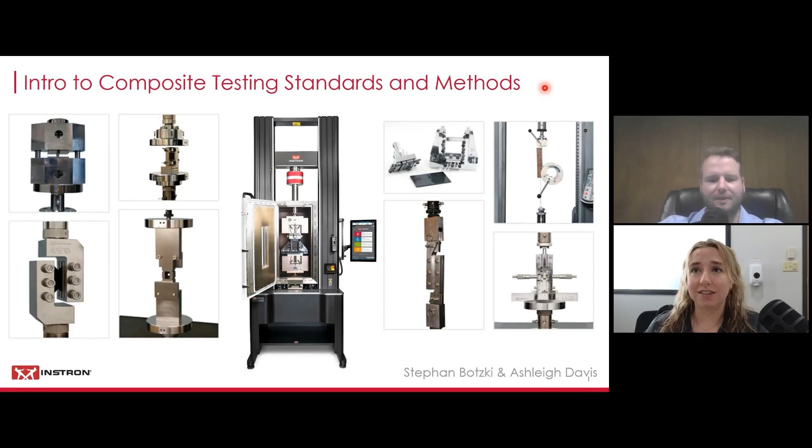So for how many different test types, it looks like 56% are 1 to 5 different test types, 24% 6 to 10, and then 19% of people are running 11 plus different types of tests.

Thank you, very interesting. This is our agenda for today. We're going to start out by looking at composite material properties. Then we're going to move into an overview of composite testing, the part where we talk about the different types of tests and testing standards that you most likely need to follow. Then we're going to look at most of the challenges associated with that kind of testing, and then some future trends, before we move into the Q&A section, where we try to answer as many of your submitted questions as possible.

I wanted to start out with ASTM D3878, the standard terminology for composite materials. This is a standard that the ASTM D30 committee works with, and it's full of definitions related to composites and composites testing. I want to start by looking at what the ASTM D30 committee actually says a composite is. A composite material is a substance consisting of two or more different materials, insoluble in one another, which are combined to form a useful engineering material possessing certain properties not possessed by its constituents.

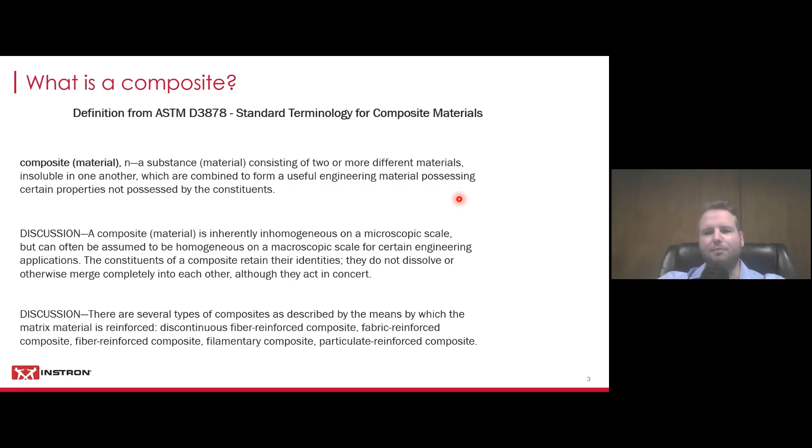A good analogy for this is concrete and rebar. You put the rebar in and pour the concrete, and they're insoluble to one another. The materials get combined, but they're not like a metal alloy where you mix in other metals and they become a new kind of metal that's soluble in one another. In composites, you keep the different materials apart, they're combined but not soluble, and they usually give you properties not possessed by the individual materials. So we're dealing with multiple materials that we try to combine.

We're going to run another poll on this slide asking about the matrix materials that you're using. So we'll move into this now. We established there are two different materials, or you could also say two distinct phases, and we break that up into the matrix and then the reinforcement within there.

The end applications for the materials we're talking about today are mostly aerospace, but there's also some adoption in the automotive industry and in renewable energy like wind energy. Wind blades are typically made from composites, and there are a couple other industries with some adoption as well.

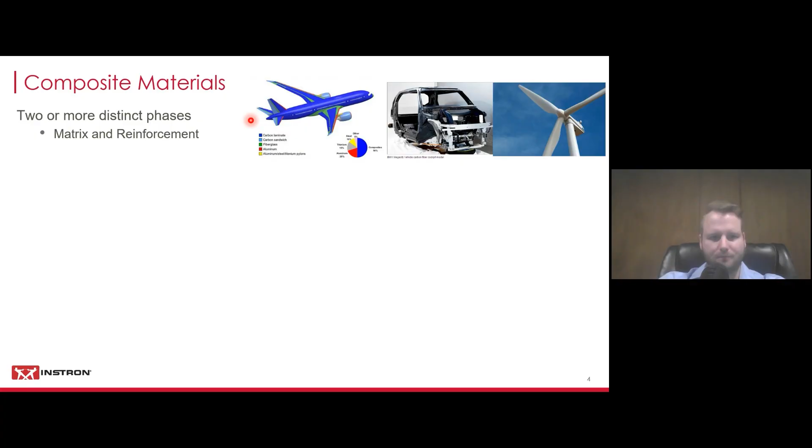The most common matrix materials we deal with are polymer matrix composites, by far the most common ones that we see at Instron that our customers need to test. But there's also ceramic matrix composites for ultra high temperature applications, which are growing quite a bit right now, and there are also metal matrix composites, plus many natural examples like wood.

So did we get any results on the poll yet? Yeah, we're looking at about 58% using thermoset, 31% using thermoplastic, and then 12%, so pretty small, using other materials—but it's definitely dominantly thermoset.

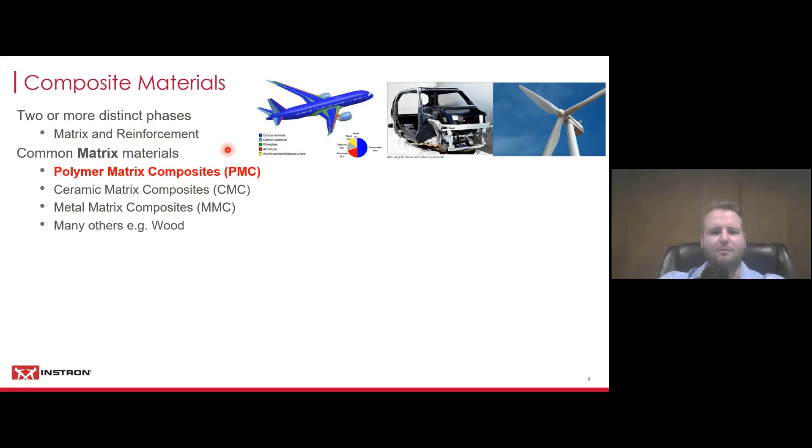That's still kind of expected, but we definitely see a trend towards more and more adoption of thermoplastic composites, so very interesting. Thanks for entering our poll there, giving us some insight into what you're actually using.

The other component we need to talk about is reinforcements, and you can break these down by their shape and form. You could have little particles mixed into your plastics or other matrix materials, short chopped fibers like in this example, or continuous fibers that go through the whole ply. Each individual sheet is called a ply, and these get laminated together.

The fibers in these are continuous all the way through and are typically oriented in a certain direction. So we can break it up between discontinuous and continuous fibers, and then of course also by the material itself that you're using.

Maybe you're using carbon fiber—we see that a lot—and then glass fiber, but there are all kinds of different fibers and also different resins. All of these are always evolving, with new composites made from new materials and new ways of combining them. We see a lot of natural fibers and resins being adopted now, making composites more like renewable materials, and recycling also becomes much more feasible.

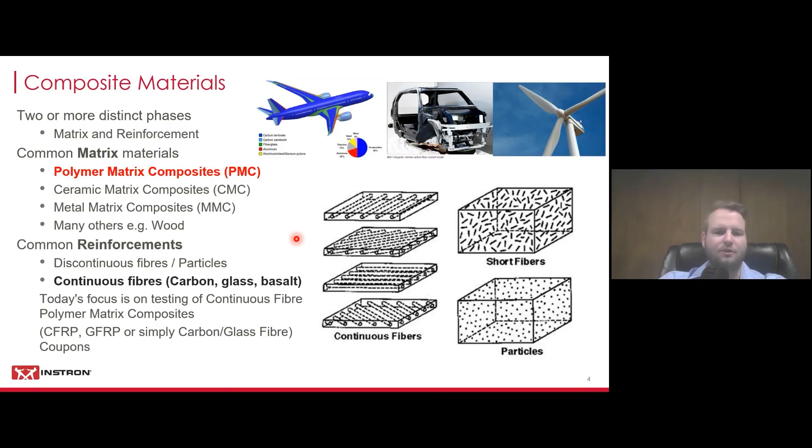Now we want to look at the bulk properties to understand the key differences from more traditional materials. If we look at metals or plastics, they're considered isotropic, meaning their properties are independent of the direction you apply a load. If you imagine this piece down here to be metal, it doesn't matter which direction you're pulling or pushing on it—it will have the same strength in all directions.

Composites, on the other hand, are considered anisotropic, meaning their bulk properties vary strongly with the direction you apply a load. In this example, the black dots represent the fibers, and the lines show their orientation. These are continuous fibers, all oriented in direction number 1, which will also be the direction in which the material has the highest strength if we apply a tensile or compression load.

In direction number 2, the material would be dramatically weaker since all the fibers are aligned the other way. Direction number 2 will be very weak, and it will basically only reflect the strength of the matrix material and how well it's bonded to the fibers—the fibers themselves cannot take any of that load.

Then there's also direction number 3, considered the through-thickness direction. Directions 1 and 2 are typically defined as the in-plane directions, while direction 3 is through-thickness. As seen previously, you usually have multiple stacks laminated on top of each other to form your composite, which is why interlaminar fracture properties are very important.

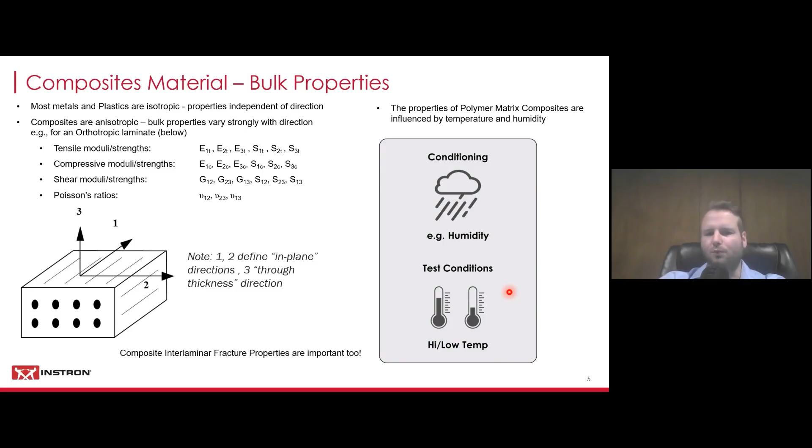And then you also need to simulate the different high and low test temperatures that your composites are supposed to be operating in. So it really depends on your end application and what kind of conditions they will see there, and then to simulate those.

Now we're going to move on into the overview of composites testing. So we're going to start out here with the testing pyramid. On the bottom is typically where Instron plays here. So you have the individual resin materials, you have the individual fiber materials, then you start combining those into the coupons, and you need to test those when they're together and then in different fiber orientations.

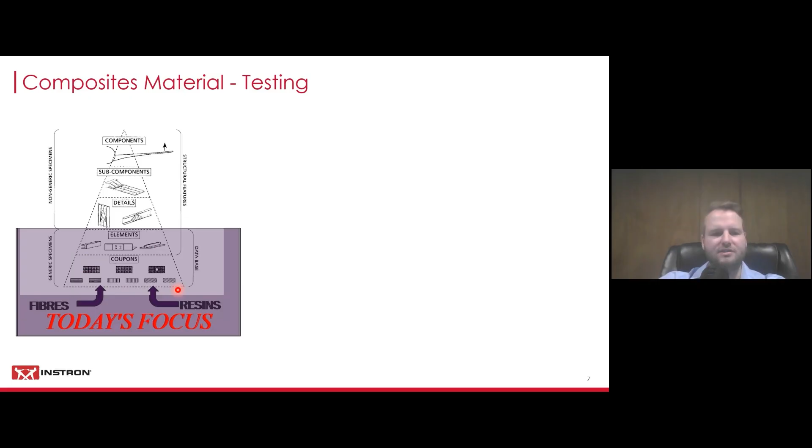And then you might start putting them together into smaller elements which need to be tested. This is where you kind of establish your databases for your materials. This is typically where Instron plays. And the most common tests that are being run down here are tension, compression, shear, and flex.

As well as a range of what we call structural tests, like coupons with open hole in tension or in compression, because fasteners are still used to combine or connect individual parts of composites. And you also need to simulate bearing loading as well as testing compression after impact. So there's a bunch of structural tests that you need to run, but also much more traditional ones.

Tension, if the fibers are oriented in the 0 degree or direction number 1 in our example, that is a fiber dominant property. And in the 90-degree direction, that is, as mentioned earlier, the matrix and fiber-matrix adhesion property.

And in compression, it really depends on how well the matrix can prevent the fibers from buckling, and the adhesion qualities between the resin and the fibers. Shear is a matrix dominant property, really depending on how well the shear stresses can be transferred across the composite material. And flex is a combination of all of those.

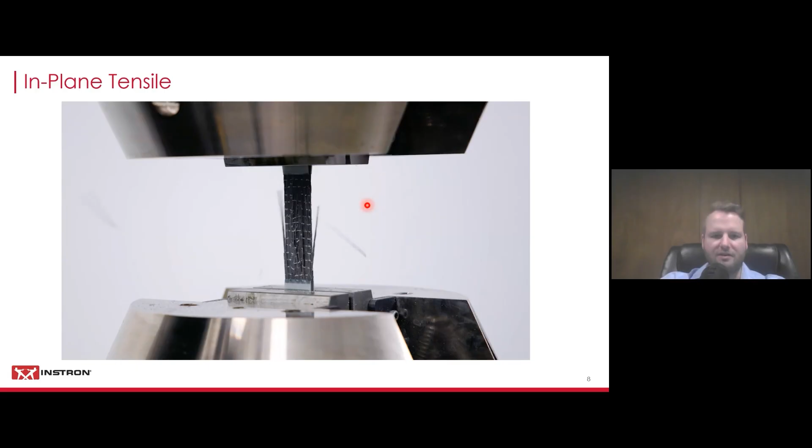Here's a video of a typical in-plane tensile test. So we're testing in direction number 1 or in direction number 2. And you can see here, this is at the end of the test. I'm going to replay this here one more time. You have fibers and parts of plastic flying around. It can be quite spectacular breaks.

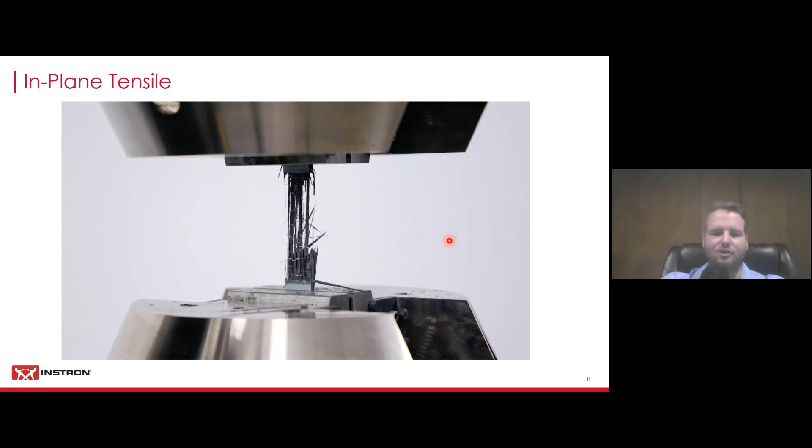But you also need to keep in mind the challenges that come with that. Of course, operators need to be careful removing the broken parts of the specimen. You wouldn't want to touch any sharp parts and get carbon fiber and plastic in your skin. So that's definitely something to keep in mind. You need to make sure that you keep your test equipment relatively clean and make sure that you clean up those fibers afterwards. Here's another video that we recorded.

It's also in-plane tensile testing, and this is now a unidirectional material. So all of the fibers are oriented on the vertical axis, and this is recorded with 10,000 frames per second. And even with that, I'm going to start playing the video now.

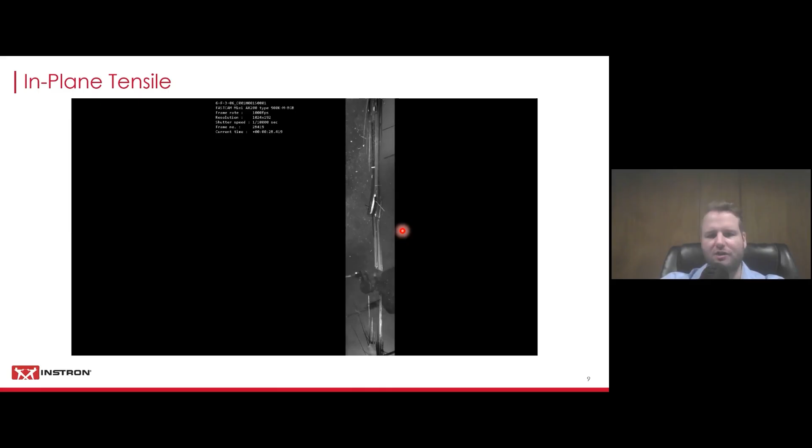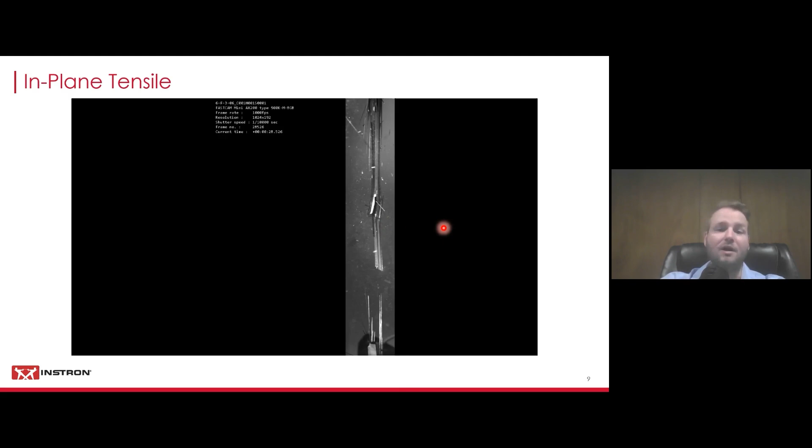Even with that high resolution, it's pretty much impossible to tell when the break actually happened. It just kind of explodes once that maximum strength is reached. And what you also can see very clearly in this video, there's a lot of dust and really fine small particles. So you need to make sure your equipment is protected from that, because carbon fiber is electrically conductive. If it gets into your electronics, it will harm your test frame, but also make sure your operators are protected from that harmful dust and debris.

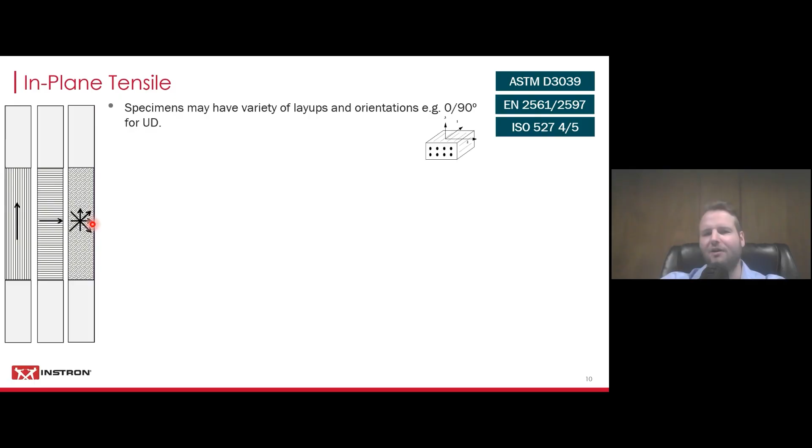In plane tensile testing, the most common standards are ASTM D3039 and ISO 527-4 and 5, but there's also a variety of more legacy standards that some people still test to. As we established earlier, specimens can have a variety of layups with fiber orientations, either in the 0 degree and 90 degree direction, or something more balanced like we've seen in the first video, where you stack different plies on top of each other with different fiber orientations to get something more balanced and more realistic for end applications.

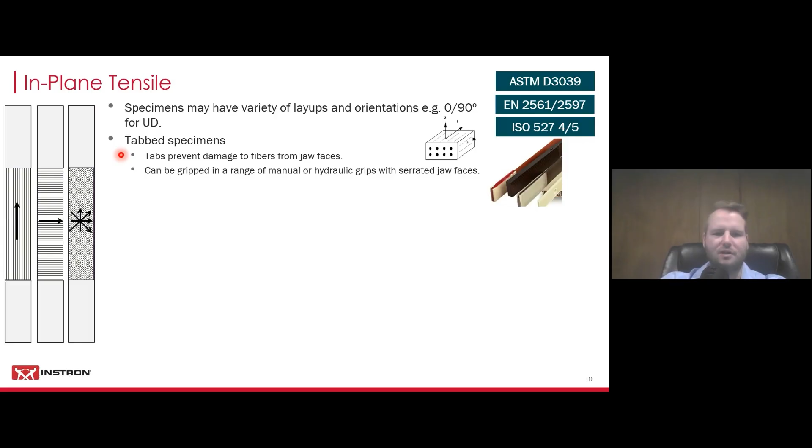We typically deal with tabbed specimens. It's interesting to see the poll results because thermosets are still clearly the most used matrix materials, which helps with this, because tabbing does prevent damage to fibers from the jaw face when you engage your grips to the specimen. You can grip composite specimens that are tabbed with a range of grips, either manual or hydraulic, with normal serrated faces. But tabbing is really time consuming, expensive, and can be really difficult. It's kind of a science, and there's some good material out there on Composites World magazine to help you get started.

But some materials, as we've established, a lot of you test thermoplastic composites, and they typically have very low adhesion quality. They are chemically inert, and they have a couple other characteristics that make it really hard to bond things to them. So you might not be able to have any kind of tabs on thermoplastic composites.

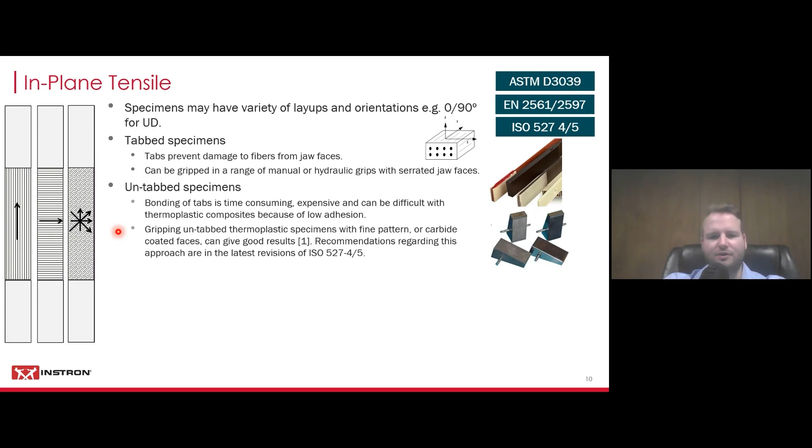What we usually do there is grip those with jaw face patterns that are very fine. We also use carbide coated faces, which can give good results. I would also recommend trying simple sandpaper or emery cloth between your jaw face. Still, I'd recommend a finer pattern, not necessarily serrated, and use the sandpaper in between to give you that grip so your specimen doesn't slip, so you can get away with just enough initial gripping pressure while protecting your specimen from being cut into. There are also good recommendations in ISO 527-4 and 5 on this in the latest revisions.

Lastly, here on in-plane tensile testing, we have pultruded unidirectional materials. They're very important, typically in the form of round rods. They're very strong in their axial direction, but very weak in the transverse direction. As we established, unidirectional materials have all the fibers oriented only in one direction, so if you start clamping on from the side, that can be difficult and you might damage your material. A common solution is using a very long grip engagement length, gripping over a long distance and using a semicircular grip profile that matches the test specimen's diameter.

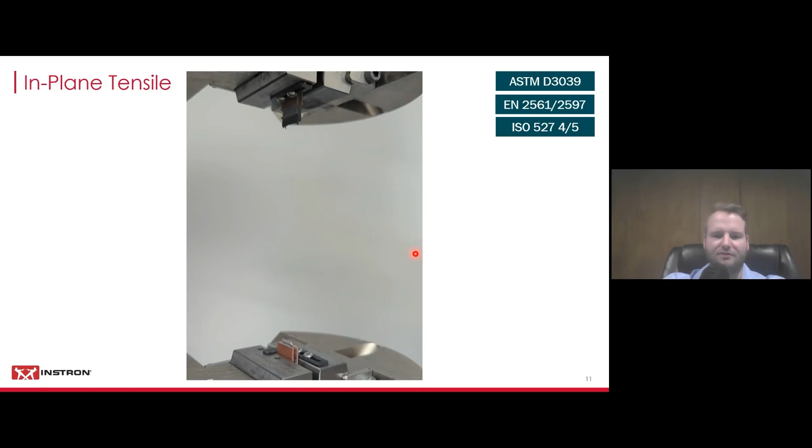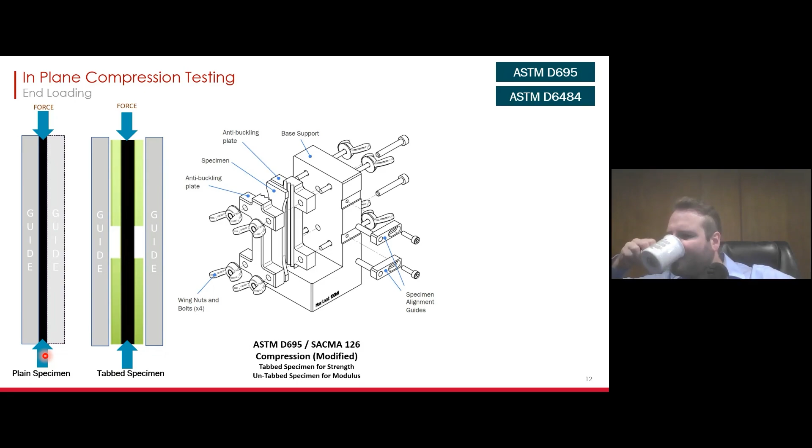You can also run this test with a test fixture with tabbed specimens, which would look like this. The green parts show the tabs of the specimen, and you're running a free gauge section in the specimen, but still supported by the guides of the fixture. You can see the anti-buckling plates with your specimen in between them, connected to the base support, where your specimen rests on the bottom and sticks out of the anti-buckling plates slightly on top, where you apply the load coming down with a compression platen.

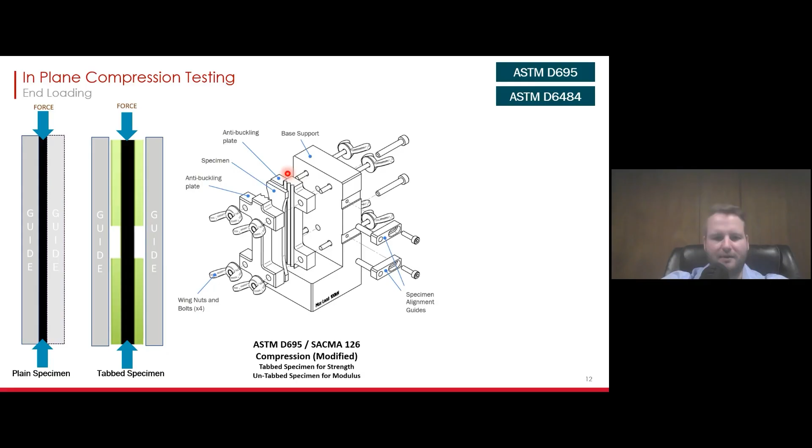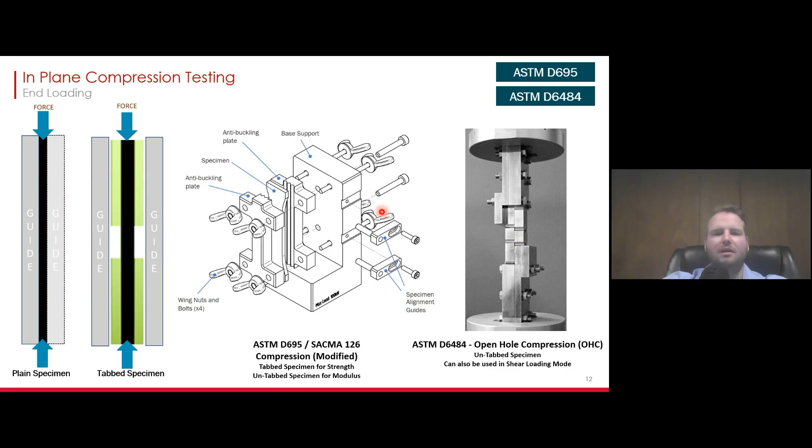For the ASTM D6484, that is an open hole compression test, which can be run either in end loading or in shear. You can use this fixture in shear, but here is the method where you're running it in end loading, with these end parts. These are not compression platens; they have a shape that the fixture fits into, and you still put that in between compression platens, so you can load your open hole specimen in compression that way with end loading.

Now we're going to move on to the next category, which is still in-plane compression testing, but now we're initiating the force into the specimen with shear. The most common standard here is ASTM D3410 and also ISO 14126, and there are a couple other standards from Airbus, for example, that run compression like this.

The difference here is you're using tabbed specimens typically, and then you initiate the force from the side. So you clamp onto your specimen with either a test fixture, something like the ITTRI fixture that you can see here from ASTM D3410, and also allowed in ISO 14126.

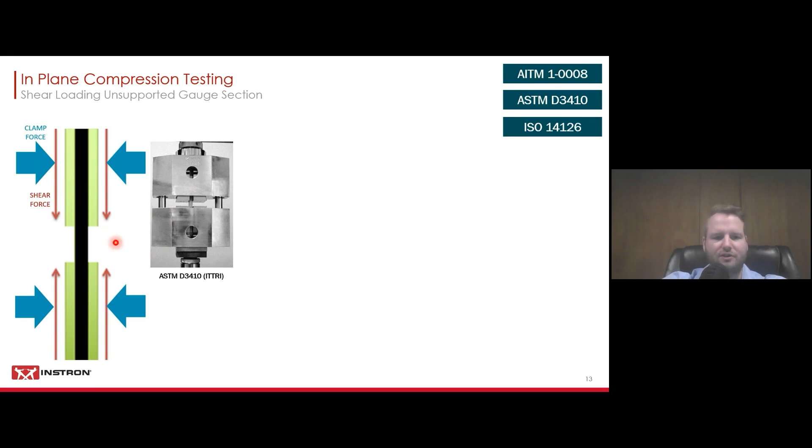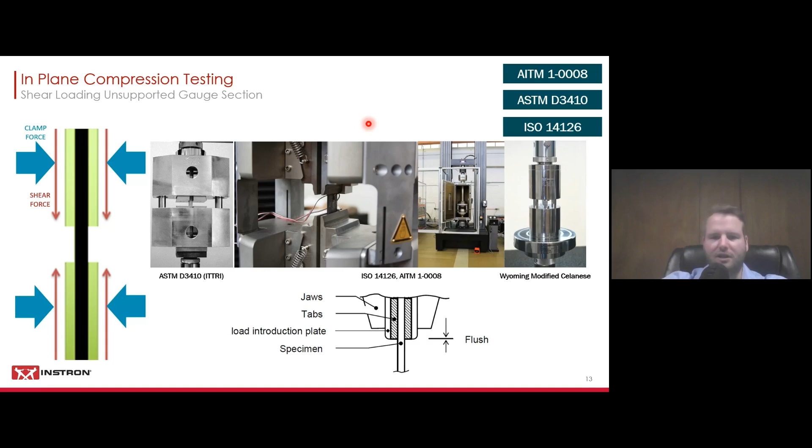So you're clamping on the sides, and then this gets driven together. Either you come down with a compression platen on top of the fixture and compress it, or if you run it like the Airbus standard allows, hydraulic wedge grips that you use with load introduction plates in between your gripping and your specimen. So you clamp on the sides of the specimen and then drive the crosshead down, initiating the compression through shear, not through the ends of the specimen. This will give you different results, so they're not comparable to the end loading results.

Now moving on to what I would consider the most common, most popular in-plane compression test, which is the combined loading approach. We're using both of those techniques we saw on the previous slides. The by far most common standard for that is ASTM D6641. And now, in the most recent revision of ISO 14126, it does allow this fixture to actually cut out the end loading and allow shear or combined loading in compression.

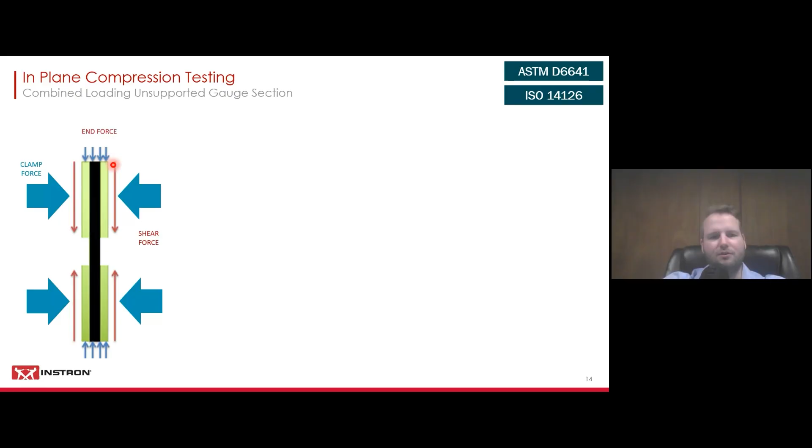And that would look kind of like this. You can use either tabbed or untabbed specimens, and then you have a clamping force from the sides onto your specimen, and at the same time also some end loading. So you're initiating the load with both techniques at the same time. And this is how that fixture looks like.

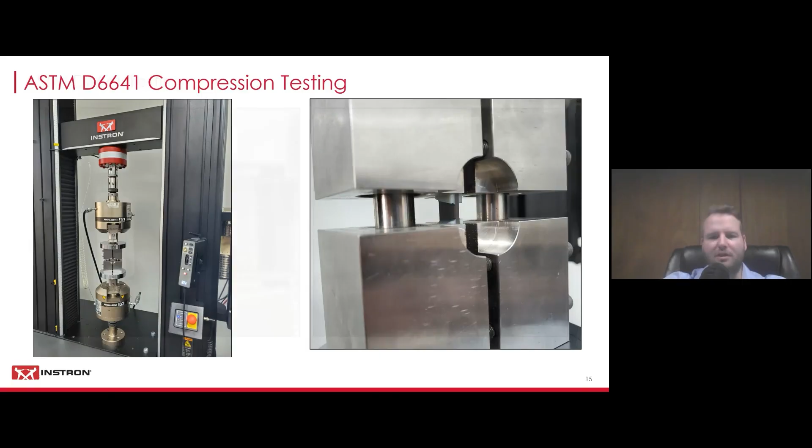And this is how it looks like when you have a tabbed specimen in there. This is a close-up now before the break, and here on the right side you can see the specimen, how it looks after the break.

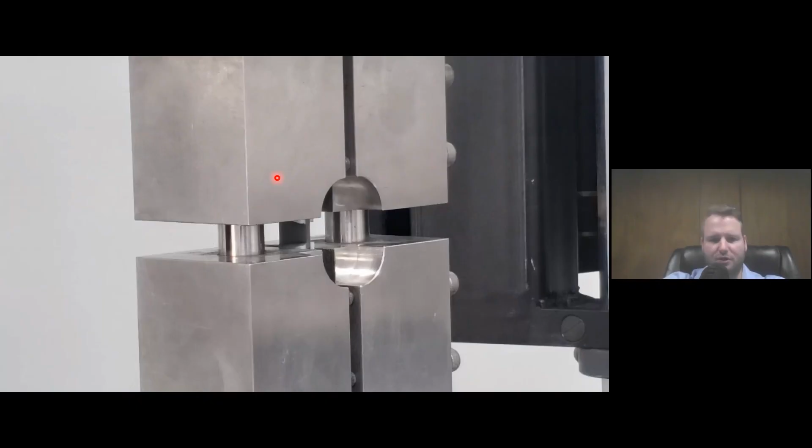We also have a quick video here, so let me give you a quick introduction before we start. You're going to see this sped up in the beginning, and then it will slow down right before the break. So when you see the fixture coming down a little bit, that's a lot of seating in the specimen and also some compression going on. Then we'll slow it down right before the break, so you can see the compliance and seating happening, and then at the end when the break happens.

So that's what a typical ASTM D6641 test looks like. You would run this test if you follow the standard, and you determine the modulus and basically all the results that you need.

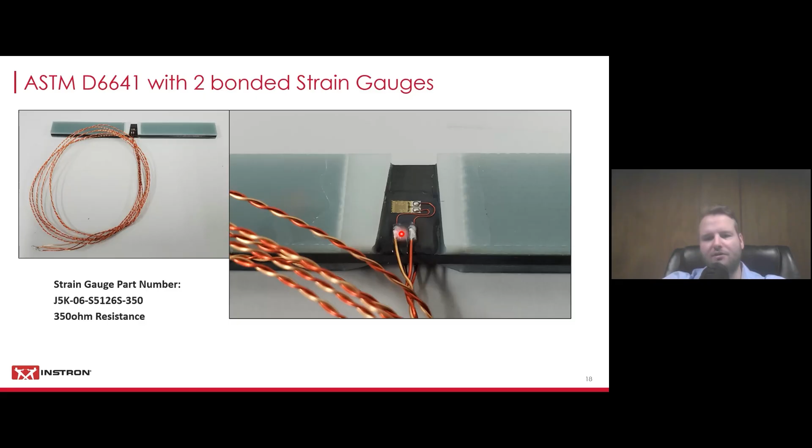Then you need to load this into your fixture, which you start with the bottom part. You have to be really careful here with the lead wires of your strain gauges so they don't get damaged. And then you put the top part of the fixture down.

Again, be really, really careful with the cables, but also be really careful with your fingers, because you can definitely pinch them in between the fixture parts. All of these parts are relatively heavy, it's very solid metal. And when you insert the top part, you need to apply some amount of torque.

Otherwise it will just kind of come falling down. So you need to find the sweet spot where you can safely insert the top part of the fixture. Like I said, it's relatively heavy, so it can be kind of tricky.

So before you load it with a specimen with attached strain gauges and wires, I would say try the fixture out by itself without any specimens, and then maybe with some simple non-strain-gauged specimens, to get a feel for it and gain some experience before you start loading expensive strain-gauged specimens.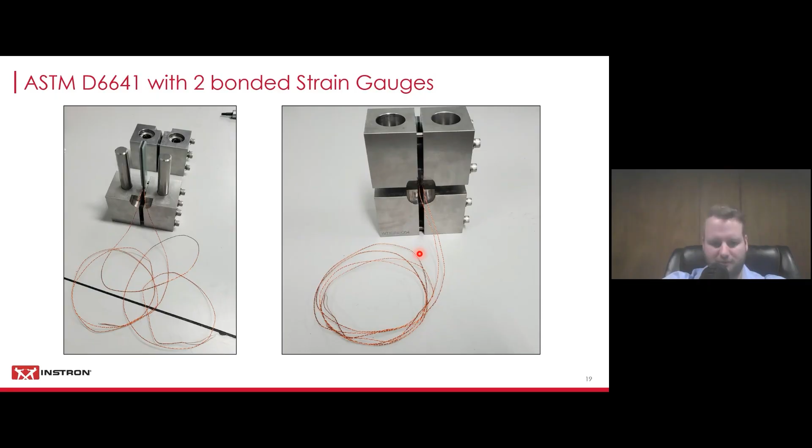And then this is how it looks when you have that installed in your testing machine. You've got to make sure the wires come out the front, and then you can run your test.

Now we're going to move on to some shear testing. We're going to look at in-plane shear, so we're still in direction number 1 and 2. The most common testing standard here is ASTM D3518, and there's another variety of other shear tests that you can run. So for in-plane shear, there's the 3518 test right here.

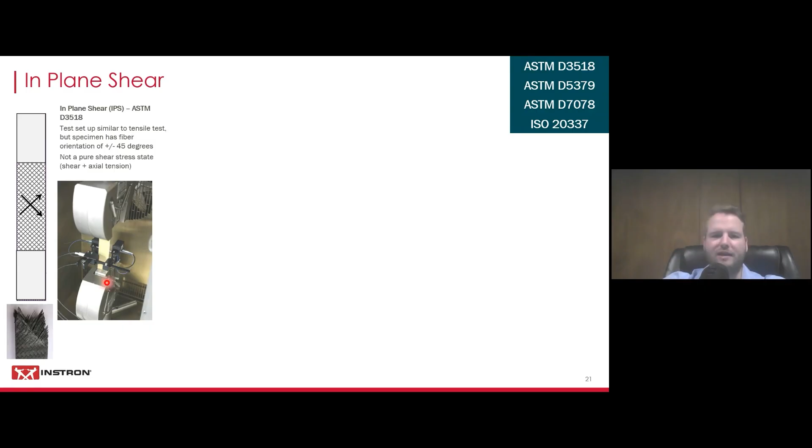It's the same as D3039, but your specimen actually has the fibers oriented now in a plus and minus 45 degree orientation, which gives you a nice shear failure like you can see here. Now it's important to note that this is not a pure shear force that you're recording—there's always an axial tension component in there. So this can give you a good idea of your shear strength, but you're not really able to use that result as a shear property.

For that you need something like this, which is the V-notched shear method, ASTM D5379 and ASTM D7078. These utilize a V-notched test specimen—you have these V's cut into it, which makes it a complex specimen. This is really difficult to do. Even rectangular coupons are more challenging than with traditional materials.

And now you need to make this V-notch specimen, and for the 7078 it's kind of similar, so that can be pretty tricky. But this gives you a pure shear state in the middle of the specimen, so this is really pure shear strength. That is what you need to determine it.

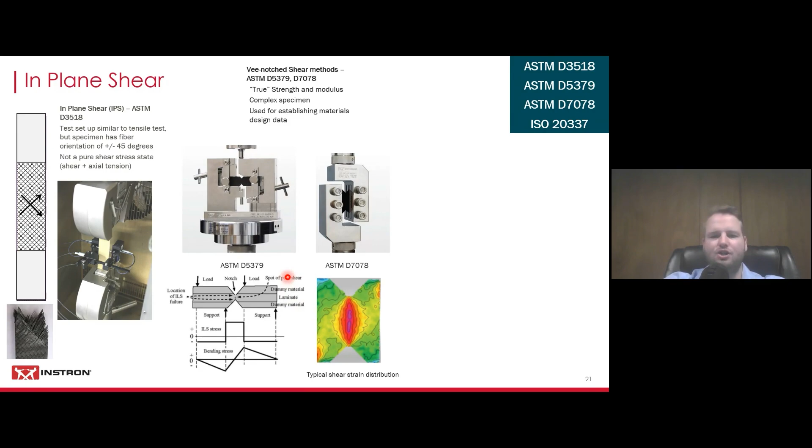And you can see a typical shear strain distribution recorded with digital image correlation. And then if you have very large shear strains, you could utilize the test method ISO 20337, which allows you to test the shear properties of specimens that have larger shear strains above 5%. These other test methods typically can't provide that.

So you would need to use this one, which again involves expensive specimen preparation. It's a really complex test with a complex fixture. So I would say nothing in composite testing is really straightforward compared to traditional testing.

But this one's definitely not the simplest.

Now moving on to interlaminar shear testing. ASTM D2344 is very popular, and we also have ISO 19927 and other standards - we're by no means covering all of them, just the most popular ones. You can run this short beam shear test, which is basically a 3-point bend setup, but using a very narrow separation on your bottom supports, with the yellow part being your test specimen. This is a widely used QC test for materials and parts, using a simple rectangular specimen.

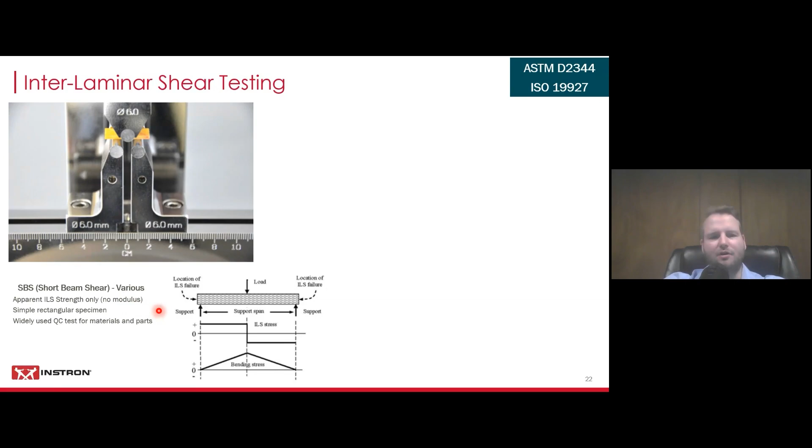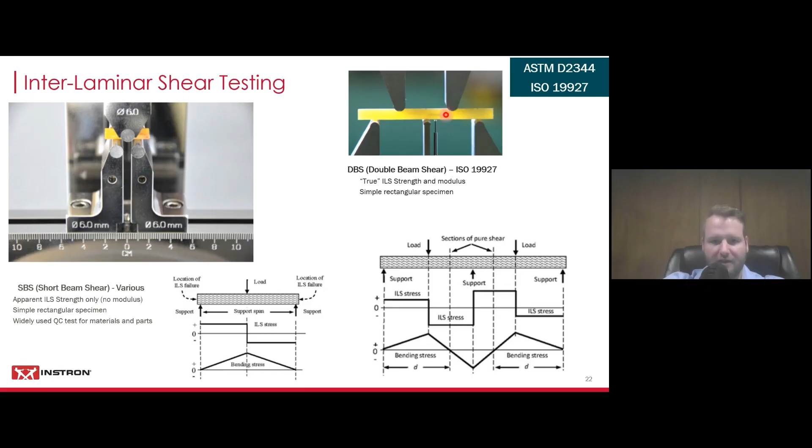However, you cannot determine the interlaminar shear modulus with this testing. For that, you'd need something like double beam shear, the ISO 19927, where you can use an LVDT or a plunger down here. This gives you true interlaminar shear strength, and you can also determine the interlaminar shear modulus. You can see the failure right here on the side in between the specimen. So that's how interlaminar shear testing looks.

Now we're going to move on to flex testing. Again, there's a huge number of testing standards covering this. It's like interlaminar shear, but now we don't want shear forces - we want to minimize them as much as possible, which is why we use a different ratio of specimen length to thickness. We make that much larger, and you basically use a simple beam loading technique.

You can run this in either 3 or 4 point application. You have 2 supports on the bottom, then either 1 loading nose coming down, or as you can see here, 2 loading noses coming down. You can determine the modulus in the 4-point bend configuration, which requires a measurement of the deflection under the specimen.

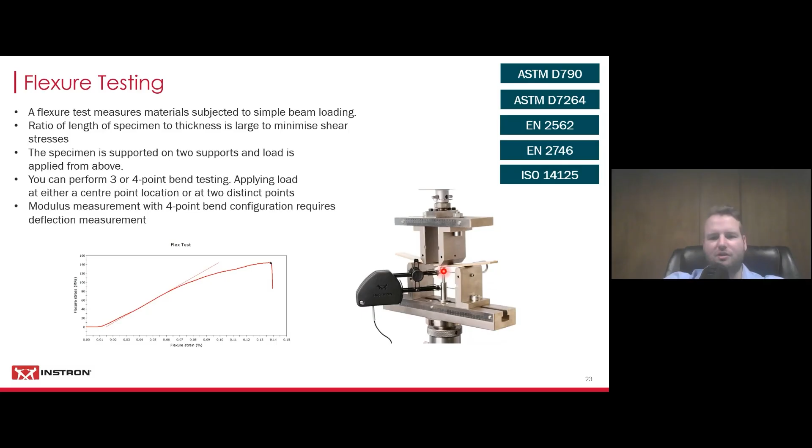Then there's the through thickness direction - through thickness tension and compression. There are different methods; this is the direct method, covered by ASTM D7291 or ISO 20975. The specimens are typically cut from very thick laminates, and it allows determination of the modulus, Poisson's ratio, and the strength. But you do require strain gauges.

Like for many composite tests, strain gauges are required to determine the modulus and Poisson's ratio. You usually have a stud that you can pull on, and then adhere your specimen to it. You take your thick specimen and glue it to the studs on top and bottom, then apply loads and pull this apart in tension, wanting the failure to happen somewhere in the middle.

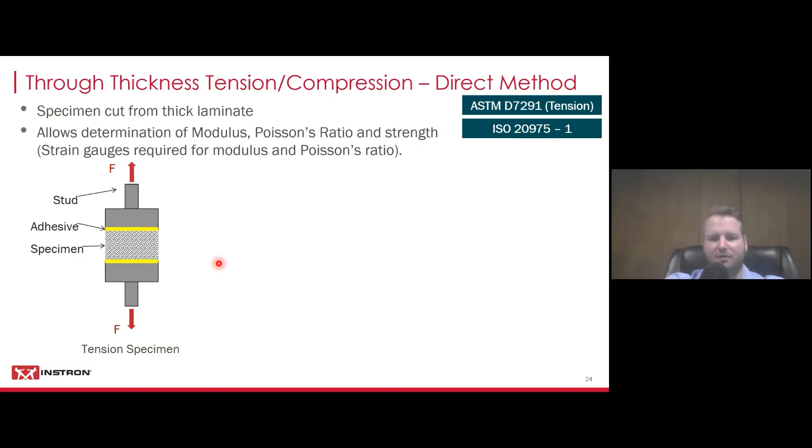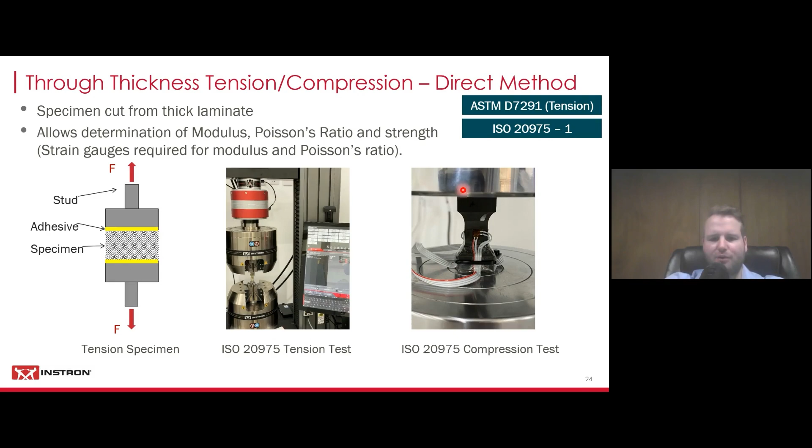That gives you the through thickness direction tension and compression strength - these are the direct methods. This is the ISO 20975 in tension on a testing machine, and this is how it looks in compression with the 2 platens coming down. You can see the strain gauges connected to the specimen to determine the modulus and Poisson's ratio.

Now moving on to through thickness tension with the indirect method. There's an Airbus standard that covers this, but also ASTM D6415, which is being revised right now in the committee.

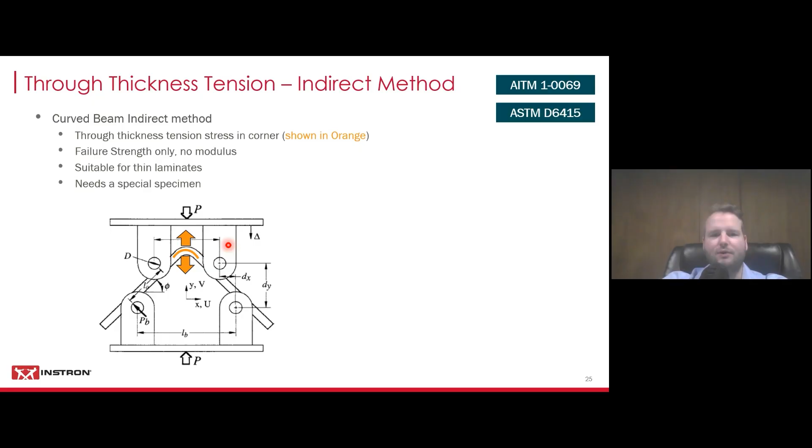This is a curved beam indirect method. You have a through thickness tension stress in the corner up here, which gives you the through thickness tension. It gives you failure strength, but you cannot determine the modulus with this test method. It's suitable for thin laminates as well, and needs a special specimen and fixture.

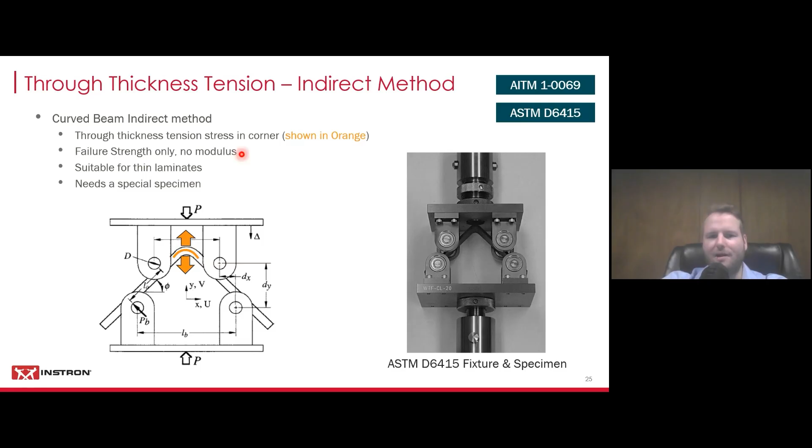You put your specimen through, with support rollers here on the bottom. You have the loading noses coming down, and as you come down with it, the force application on top and bottom gives you a tension stress right up in the curve of the specimen. But again, it's not possible to determine the modulus with this.

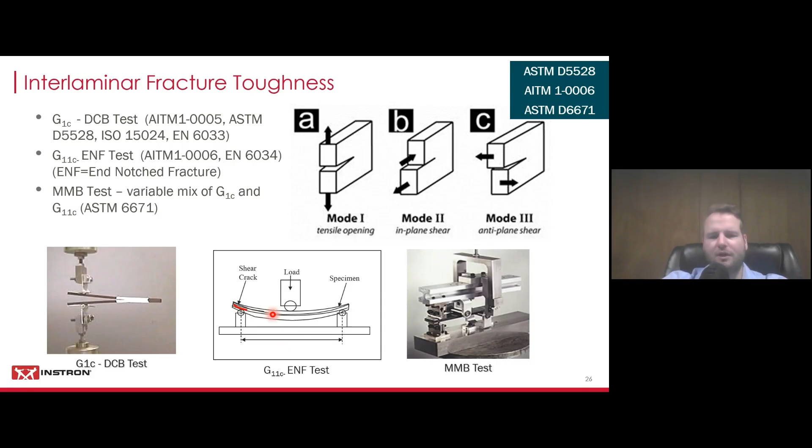The testing standard explains it, and then you start pulling this apart, and you need to determine the fracture toughness as the crack grows through the specimen this way. In mode 2, it looks like this - basically a 3-point bend setup, but you have a shear crack, and you try to grow it through. Then this is the mixed mode bending fixture, where we do both at the same time.

Moving on to bearing load testing - if you use fasteners to combine different composite materials, this is something you'll have to simulate. There are different Airbus standards as they use this technique to combine composites on their airplanes, and there's also ASTM standard and legacy standards from EN that cover these test methods.

The specimens have a hole, and then you have a pin or a bolt with which you're loading it. So you put that into the hole you initiated in your specimen, and then you apply averaging extensometers on both sides. It's important to understand that bearing strength is not a material property, as it changes with size - the size of the hole does change your bearing properties.

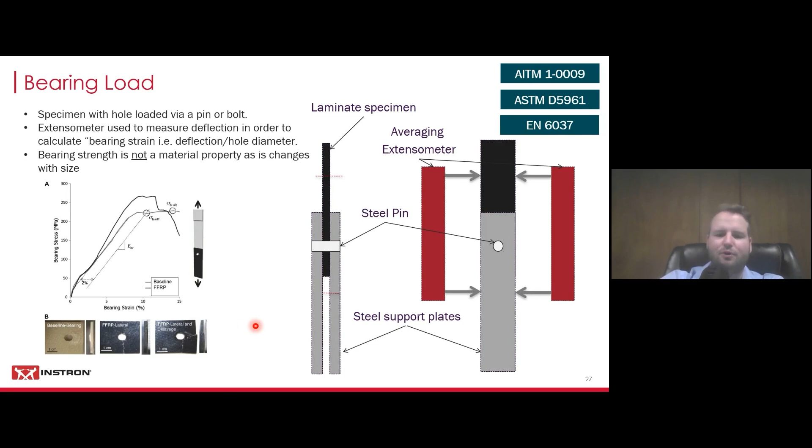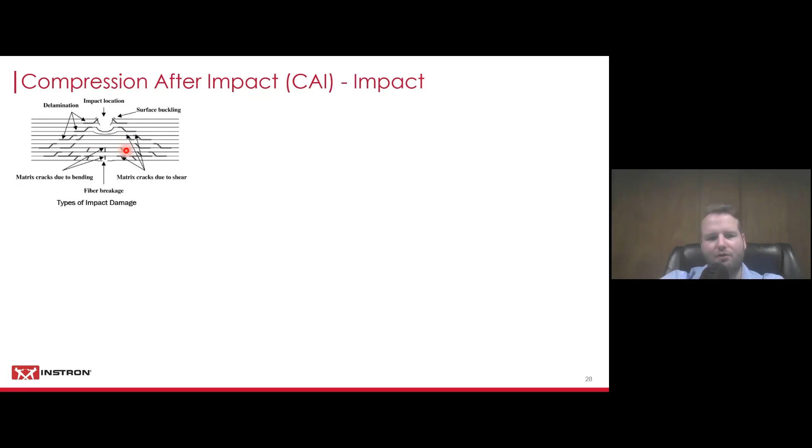And now compression after impact, another one we need to look at here. So you have a failure from something like an impact at this location. It might be visible, it might not be, but that doesn't mean you don't have any interlaminar cracking or other kinds of failures from that impact. So you need to simulate that, which typically looks like this.

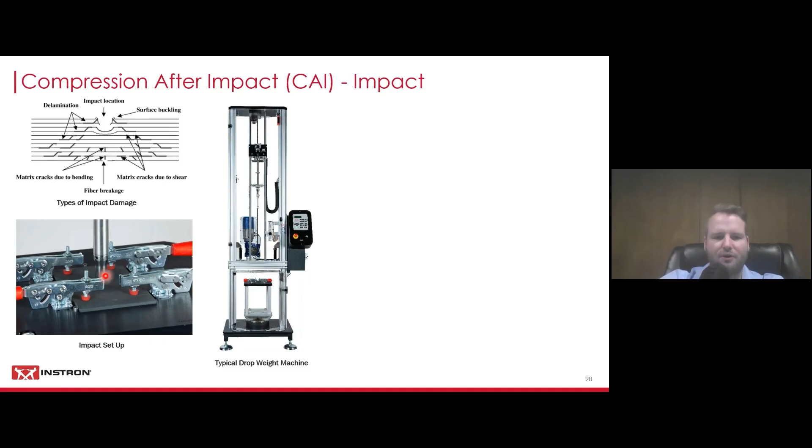You have a plate which you impact with a known force, usually done on a drop tower. You can see here the drop weight on the vertical axis coming down, and this part down here is where your specimen is clamped. Then you impact that with a known force, which you can record with the drop tower.

Then you go a step further and take that already impacted specimen and put it in a test fixture, depending on the testing standard you're following. Again, there's ASTM standards, Airbus and Boeing standards, as they need to simulate this. Then you compress that fixture with the already impacted test plate, and it gives you the residual strength of your composite after it has been impacted.

This is typically done to simulate something like a tool being dropped on an airplane wing, or maybe a bird that unfortunately hits the plane. So you need to make sure that if an event like that were to happen, your material still has enough strength left to carry all the loads and not fail in operation.

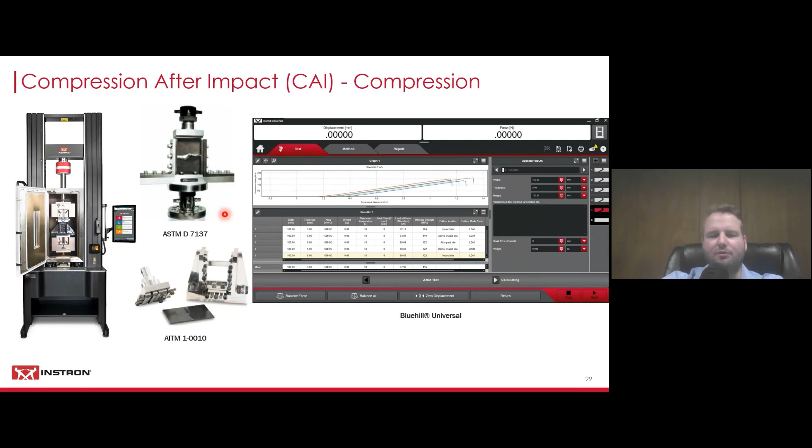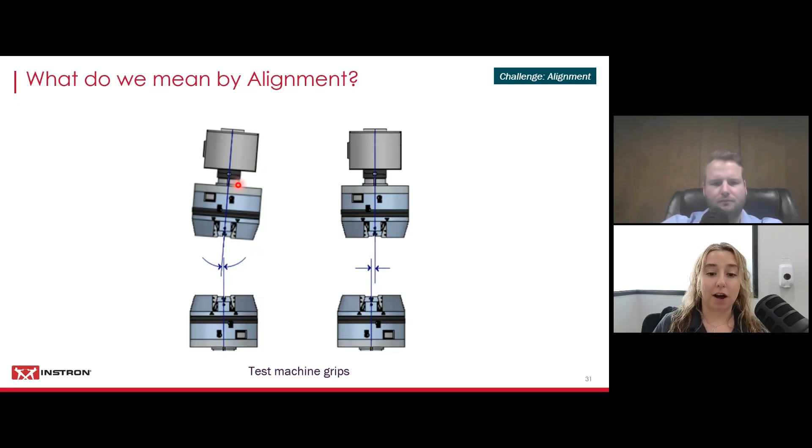In the center of our slide here, we have a typical load string with the load cell and some hydraulic wedge grips. We're seeing two of our common cases of poor alignment, somewhat extreme. On the left, we are not coaxially aligned, so this is causing an angularity error - our top grip is not parallel to the bottom grip. What happens is that our specimen is actually bending, creating a positive strain on one side of the specimen and a negative strain on the other side. I'm going to typically refer to this kind of bending as a bending moment.

The next kind of error that we typically see is concentricity - our grips may be parallel, but they are offset. What this is going to do is create a worse kind of bending error or bending moment that creates this S-type bending. So now we actually have regions of positive and negative strain occurring in the specimen. And if our specimens are shorter, then we're going to see an even increased effect on the bending moment of those specimens, rather than if they were longer within that load string.

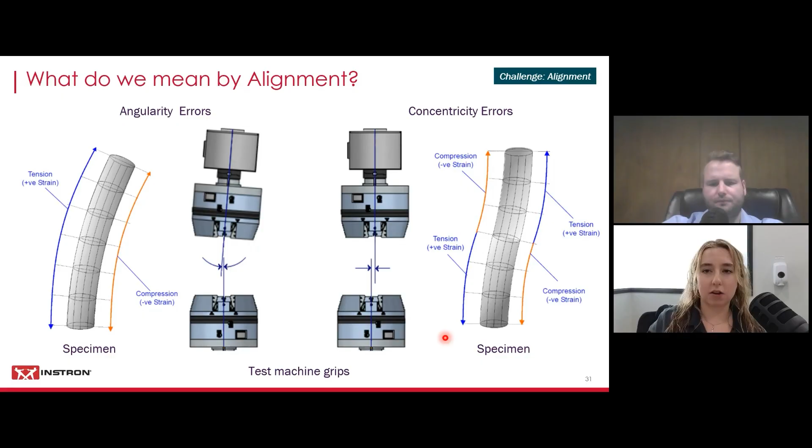So why is this all important to our testing? If we go to our next slide, we have an example of our specimen that has an angularity error. We have that higher strain side on one side and the compressive strain on the other side.

I'm actually going to talk about metal for a second. Metal is an isotropic material. It's going to carry the load on the positive strain side, and then after we've reached our yield, it's actually going to redistribute that load. So what that does is that if we're misaligned with a metal piece, our modulus and our yield are going to be affected. Our elastic region is affected. But once we've hit the plastic region, our ultimate tensile strength and our ultimate strain are actually not affected by that misalignment because we've been able to redistribute that stress within the specimen.

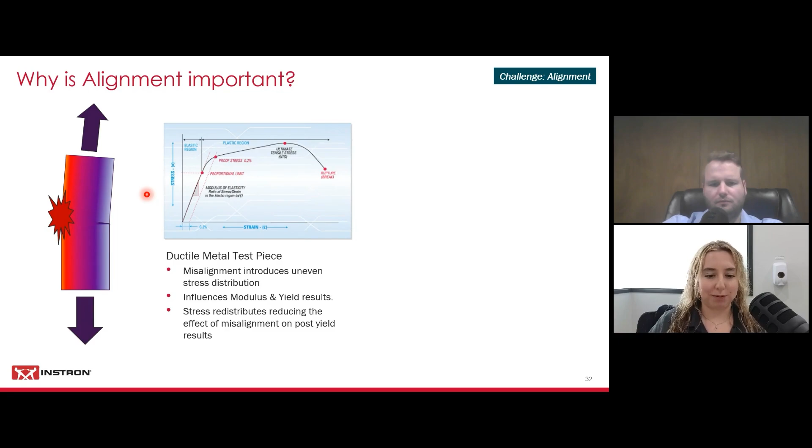If we have a composite that is misaligned, composites are very sensitive because they're typically brittle, typically low strain, and if you have fibers aligned in a certain orientation and you've already pre-strained those fibers, it's very likely that you've actually damaged the specimen when loading before we've even started the test. So we've created uneven stress strain distribution. We have some fibers that have started to fail in one region, and we're going to rapidly fail shortly thereafter. So we're going to see effects not only on our modulus and yield, but also in our tensile strength and our ultimate tensile strain, accounting for worse results within our composites if we are misaligned.

And we have an example of how significant this can be. A couple of years ago, we did an internal study where we loaded some composite specimens into a frame that we knew had grips that were not perfectly aligned. You can see in the graph on the right, we have a pretty big distribution within the stress strain curve, as well as a pretty big distribution when it comes to that tensile strength and our ultimate tensile strain.

Now, we then aligned the frame, which I'll talk about later about how we do that. We can see that deviation within those curves is significantly lower. Our ultimate tensile strength deviation is significantly lower, and we actually saw that our ultimate tensile strength increased 6% after we did proper alignment. That might not seem like a lot, but that could be the difference between shipping or not shipping a product. We also saw that our tensile strain increased as well.

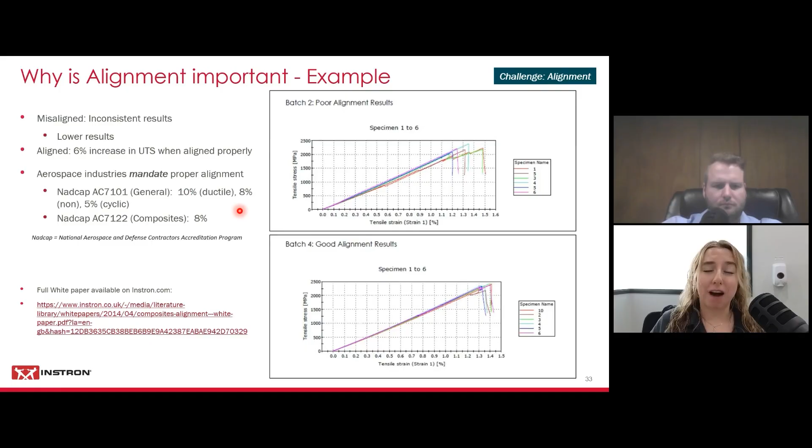So certain industries mandate proper alignment, especially aerospace industries, and this is coming from NADCAP, the National Aerospace and Defense Contractors Accreditation Program. When it comes to metals, they require that ductile metal does not have more than 10% bending moment within that load string, no more than 8% bending moment in non-ductile metal, and no more than 5% bending moment in cyclic applications. When it comes to composites, they require no more than 8% initial bending moment in the load string in order to pass compliance.

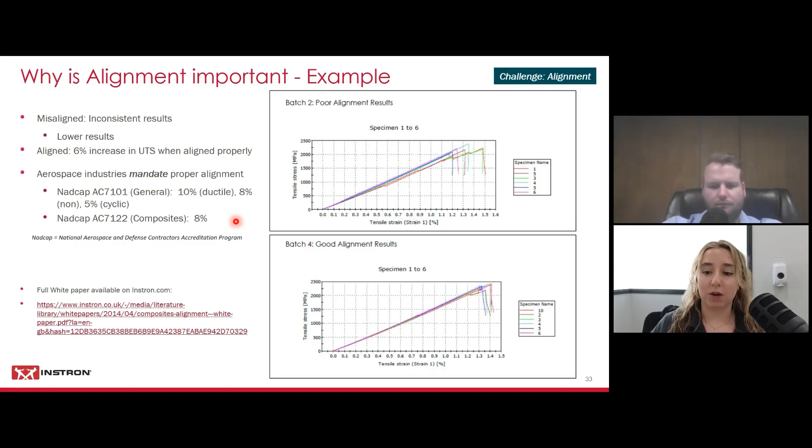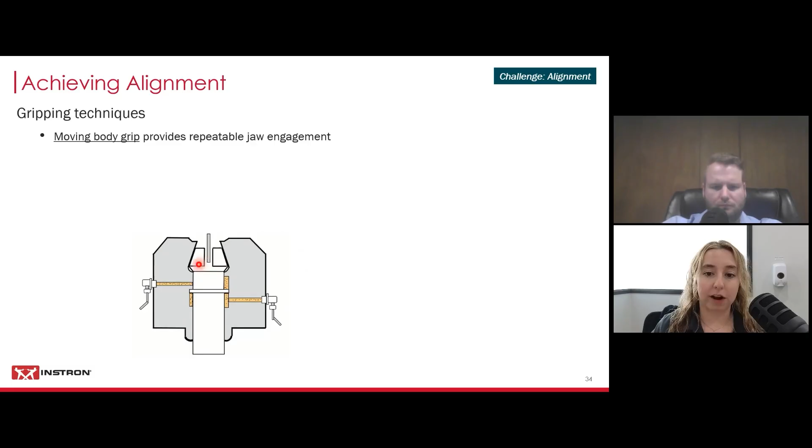So then how do we actually achieve alignment within our load string? Talking about grips, we recommend moving body wedge grips. This pushes our jaw faces towards the specimen, providing repeatable jaw face engagement. We have a side-to-side symmetrical wedge pocket that controls the alignment as well, and then we want the body of our grip to actually be symmetrical front to back.

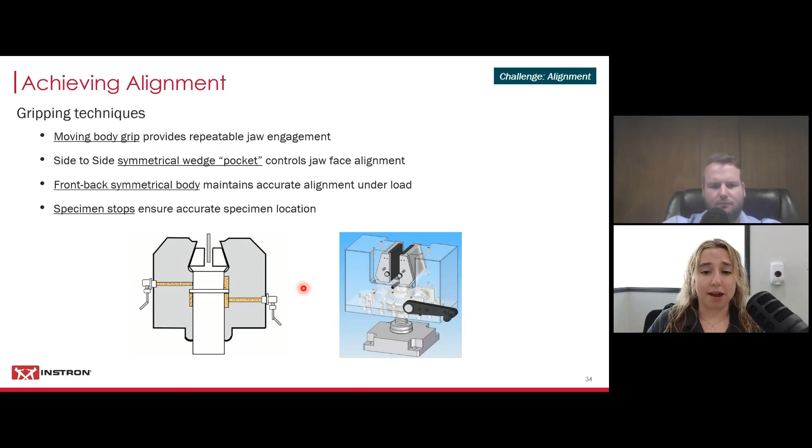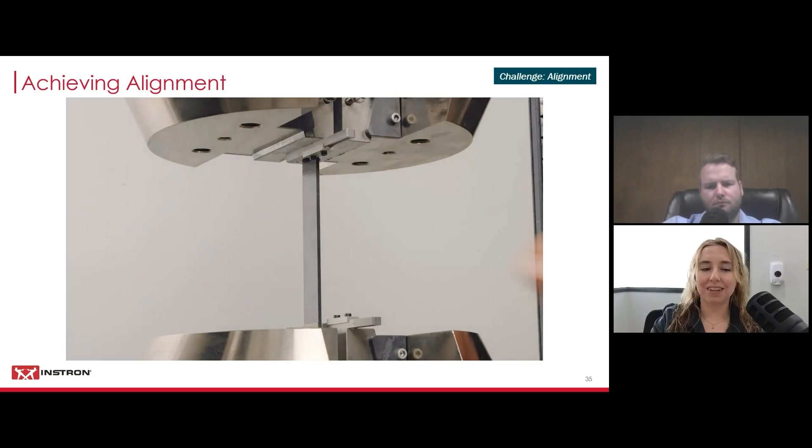And then very simply, you can use specimen stops within your grip space, and we have a video to show how those are used. A specimen stop is a very simple design that you can screw onto your jaw faces or maybe your grip body. You would take the width of your specimen and then place the top and bottom alignment stops in your load string. Not only does this mean you're ensuring the same placement every time and getting proper alignment, it's honestly just way easier to load into the load string. It's not as awkward having to hold your arm in place in one spot. So next, I'm going to talk about the system itself.

It's no good having a rigid load string if the system itself is not rigid. So we want to make sure that we're using precision designed and built frames that are guided and have high axial and lateral stiffness. Our 6800 series of frames have been designed with this in mind, with large diameter ball screws, thick columns, and a nice thick steel crosshead.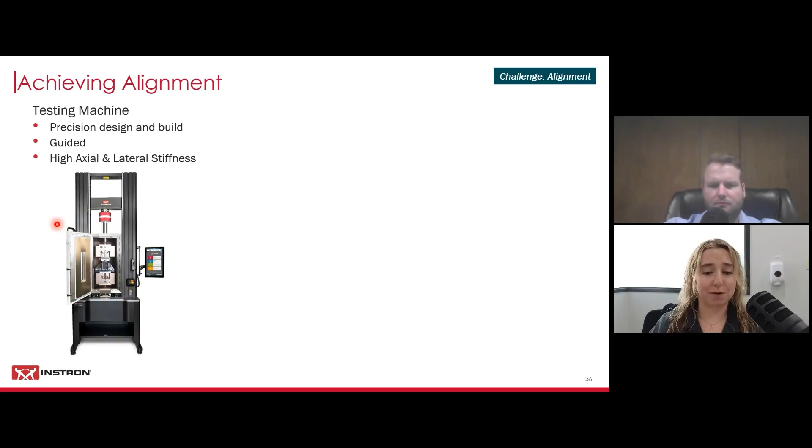Not only does that contribute to our alignment, but we want to make sure the frame can handle the wear and tear of composite testing and those high energy breaks we might see over and over again.

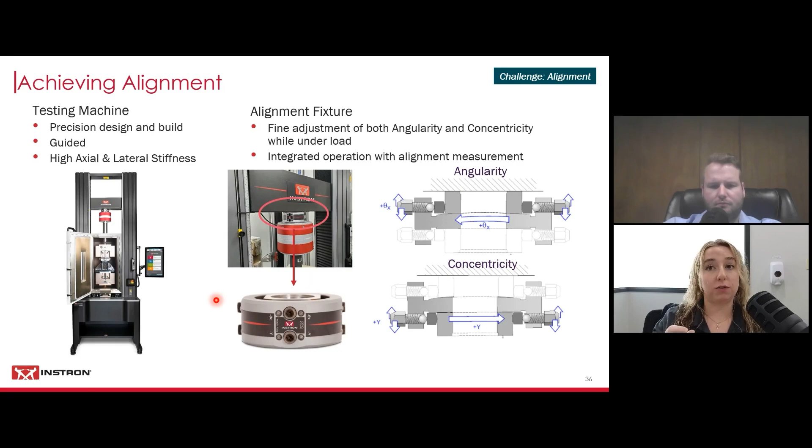Furthermore, we can add an alignment fixture to the load string. Here we see our version called the AlignPRO. It sits permanently between the load cell and the crosshead, and there are 8 set screws that you can adjust for angularity and concentricity. In the next slide, we show the effects of adjusting those.

For alignment, typically you take an extremely stiff specimen with strain gauges reading the top, middle, and bottom bending moments. You load up your frame, and then you can read the actual bending moment occurring within the specimen itself. So there Stefan is showing the top, middle, and bottom bending moment.

As the field service engineer, or someone accredited in alignment, adjusts the AlignPRO, we're seeing the change in that bending moment happening actively. This software also suggests what to do to achieve the best or lowest bending moment within the load string.

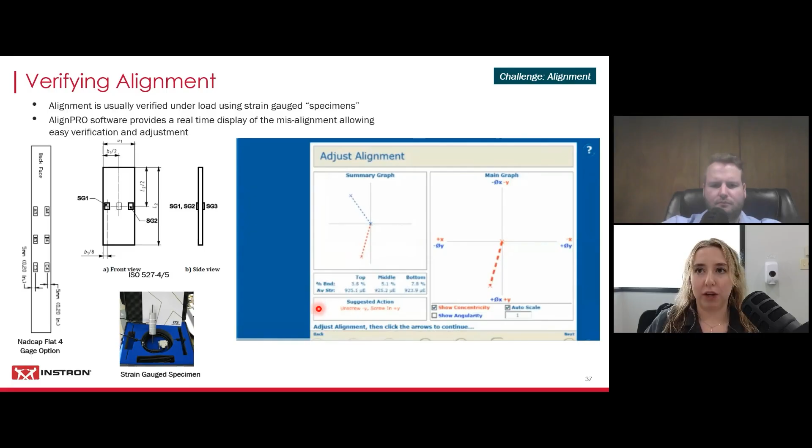Down at the bottom, it shows suggested actions like unscrew -Y, screw in +Y. After your load string is adjusted, or even if you don't get it adjusted, you have the option to have this reported out for your lab's accreditation or just your records.

So looking at compression, we talked about tension. For compression, we typically use compression platens that have locating rings and very strong surfaces that can again handle the wear and tear of testing over time.

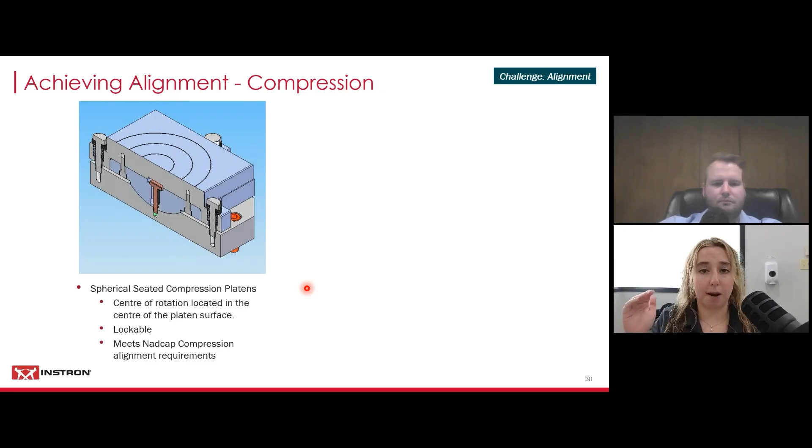We recommend putting a spherically seated compression platen on top and a rigid compression platen on the bottom. You drive your platens together, and once they're perfectly parallel, you lock in the spherical seat, which meets the Nadcap compression alignment requirements.

When doing compression testing with a fixture, like the variety Stefan talked about earlier, we want to make sure these are also laterally stiff and well guided, sitting between those parallel compression platens. The guidance now comes from the fixture itself rather than the machine, but these are also okay for alignment as well as Nadcap.

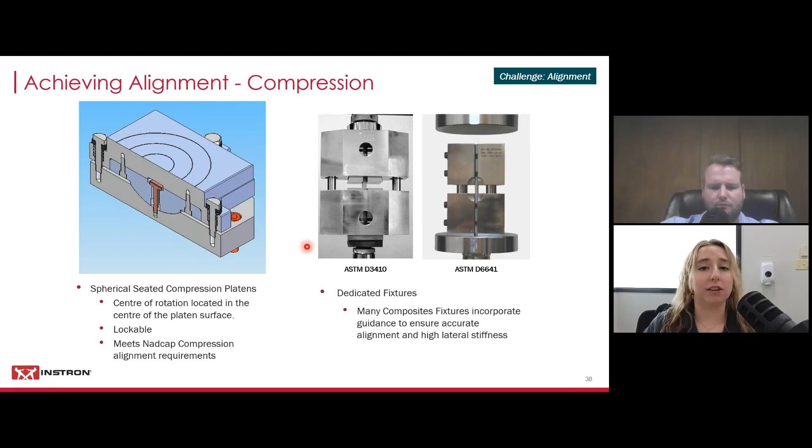This is kind of a twofer slide when it comes to alignment and productivity. Let's say your load string's been aligned with tensile grips, or if you're using tensile grips that are very heavy and cumbersome, you might not be able to remove them from your space. If you're aligned and you do that, you'll negate the alignment you just did. So you want to take advantage of piggybacking.

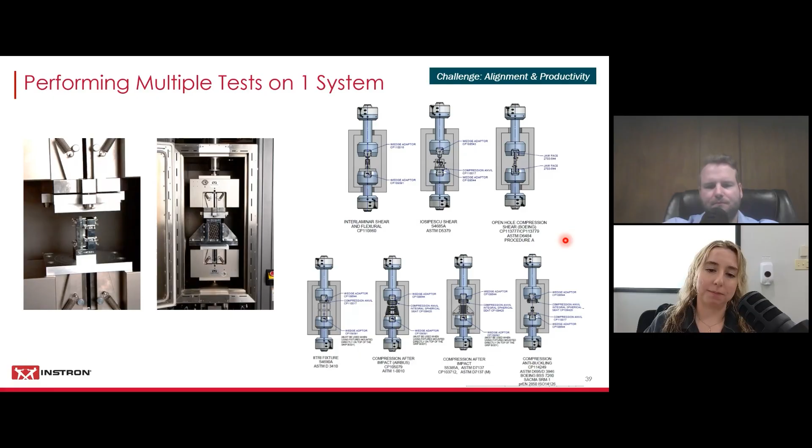On the left, we have examples of piggybacking with precision manual wedge grips inside a chamber system, which I'll talk about next. On the right, we show even more variety of tests for shear, flexural, and compression, showing we're capable of piggybacking within extended hydraulic wedge grips also going into a chamber system. If you are using a chamber, double check that the temperature rating of the fixtures is okay for the desired testing temperatures.

So let's say you're using temperature chambers. These can typically do both high and low temperature testing. For heating, we use electrical heating and air circulation for uniformity within the space. For cooling, we either use liquid nitrogen or carbon dioxide, which takes temperature down to about -150 Celsius. For long-term or creep testing, we recommend looking into mechanical cooling or refrigeration type systems, which other companies can typically handle.

When it comes to humidity testing, as Stefan said earlier, specimens are commonly conditioned prior to testing under humidity, but they might take a long time to come to equilibrium. So testing can typically be safely done at non-ambient temperature only. In some cases, humidity may be required for long-term creep or fatigue testing, which we recommend looking at with third-party humidity systems. Instron does not offer any long-term humidity systems.

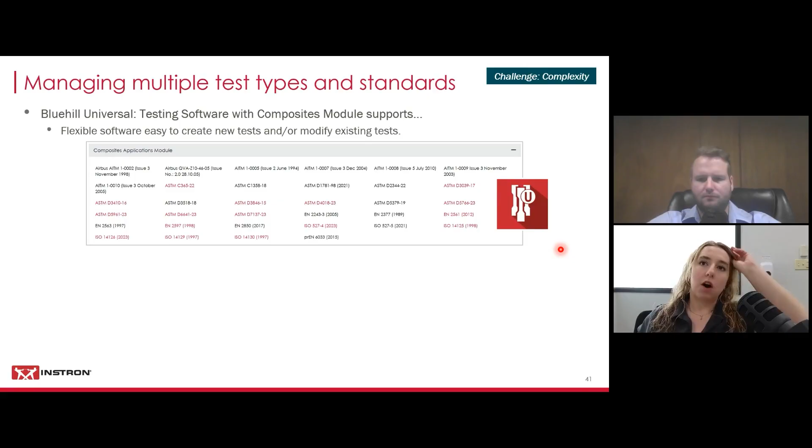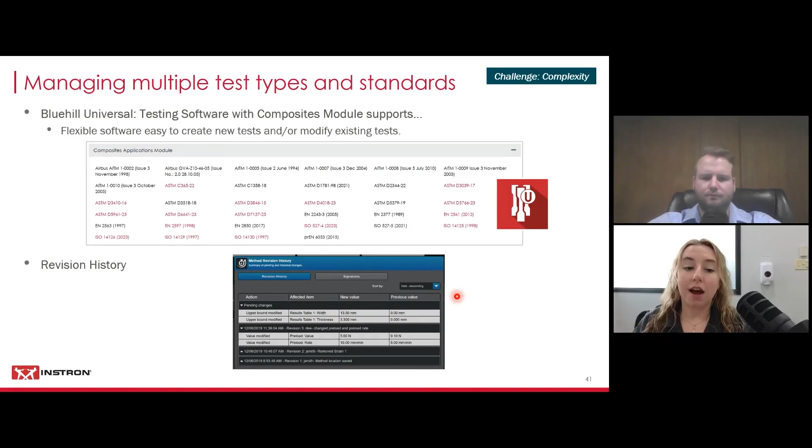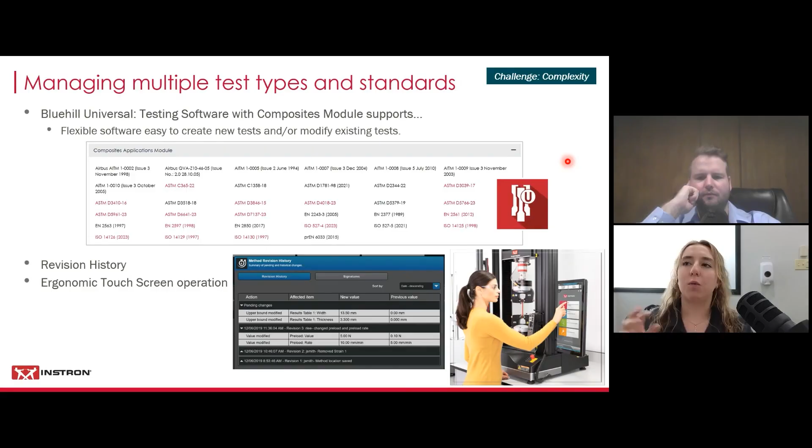And then lastly, Bluehill is available on Windows 11 compatible touchscreens, and these do mount to the frames itself. So what this means is that you're not having to input any values or start the test from a different desktop you have to walk over to. We're keeping everything within one cell, so it's nice and ergonomic.

So going back to NADCAP, NADCAP not only requires alignment, but they also will perform audits, including auditing documentation and procedures, but also maybe you're doing your own kind of auditing internally. We have options for helping with auditing.

We have a traceability option within Bluehill, and this is fully NADCAP audit compliant. There are two main features to traceability. The first one is the audit trail, which tracks your logins, your logouts, and any kind of deletions. Essentially, it's tracking any major keystrokes happening on the system itself. This is all stored in a SQL database, which can then be searched through or filtered and easily pulled up for those audits. The second aspect of traceability is electronic signatures.

This is totally optional, but if you wanted to have sign-offs done on method changes, sample file reports, or report outs or changes, you can have these signatures done at the system rather than having to print out documents and get them physically signed or tracked. This keeps track of any changes that are made. You can do one or two levels of sign-off before you release the method.

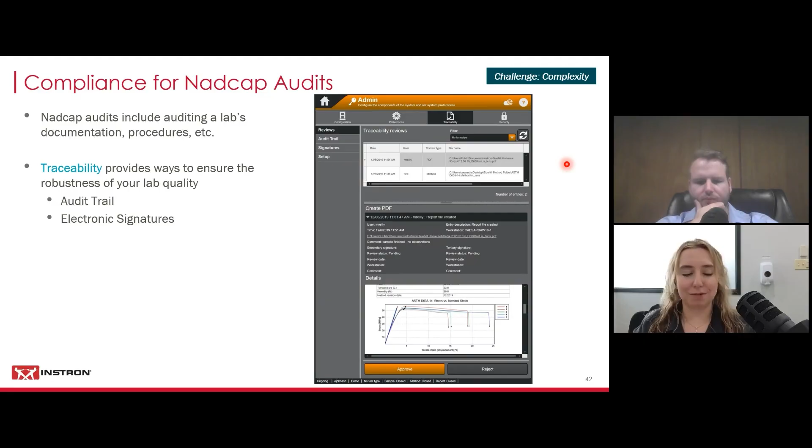And then let's say you have a lab with a bunch of frames—we have something akin to a lab management system called Bluehill Central. Bluehill Central connects all of your frames to one network, and your methods and sample files can be viewed in an office or at a personal location.

If we hit next, we actually have a nice animation of this. So we have our laboratory with all of our frames. Those are outputting any test results to the office. And then if the office wants to make any changes to methods, let's say the frames are all running the same method, rather than going to each individual frame and making the same change to every frame, or taking a USB and plugging it into every frame, you have the option to make the changes in your office location and then push it to the laboratory.

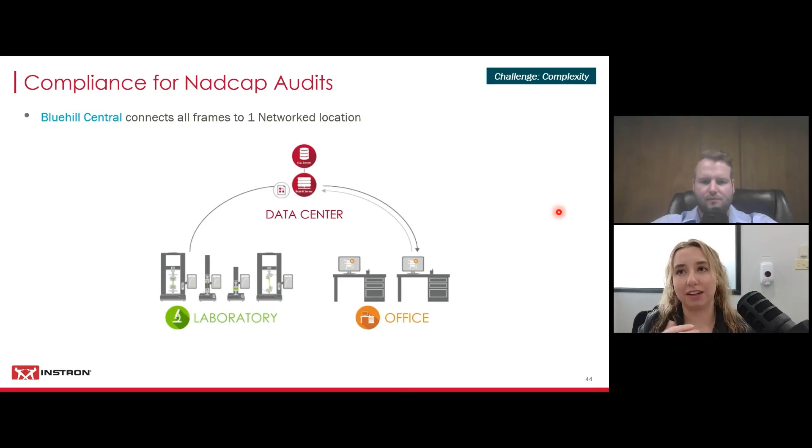So again, just to reiterate, we're getting all of our data sent to our office, and we're getting any kind of major changes pushed to our laboratory. So everything is similar and the same.

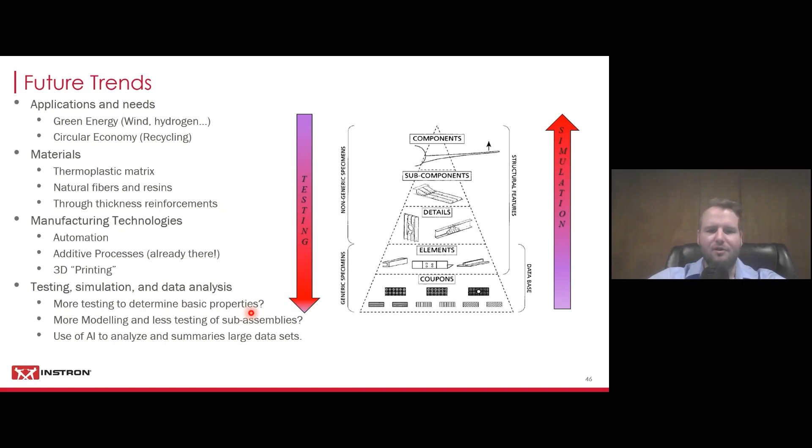One of the first ones we got is, what is the best option for high temperature tensile compression testing? They give the example of 260 degrees C for reinforced polymer composites. Do you use a strain gauge or a video extensometer? Yeah, that's a good question. It really depends on what testing standard you're following and if the video extensometer can achieve the required precision and accuracy requirements of the standard, the ASTM or ISO classification, really. So it depends on the video extensometer. But yeah, strain gauges are always still used a lot.

What kind of applications require testing of the Poisson's ratio? Yeah, if you really want to fully determine the properties of your material, then that is something you'll have to do. You'll have to measure the strain in the axial and transverse direction within the same test to determine it. For example, in ASTM D3039, it is optional, but if that is desirable, then that is one you can follow. And then also ISO 527-4 and 5, although they do refer back I think to the original -1 and so on, but they do also have a section on the Poisson's ratio. So if you want to fully determine your properties, you do need to run that test.